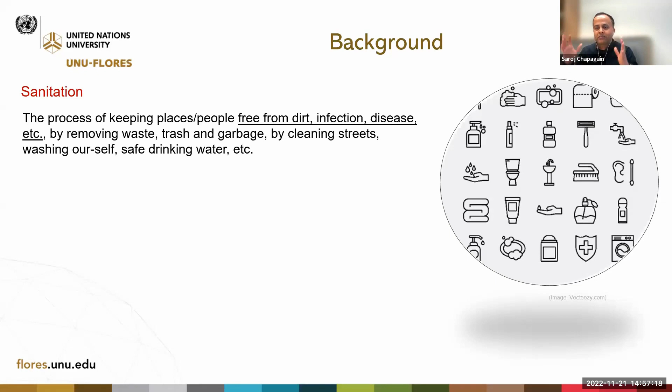So you can see in the picture, it comprises a range of activities. But due to the time and today's presentation scope, we are not able to talk about all those sanitation aspects. So I'll be focusing here on dealing with the handling of human excreta and urine, the safe management, handling, or treatment of human produce like excreta and urine in our daily business.

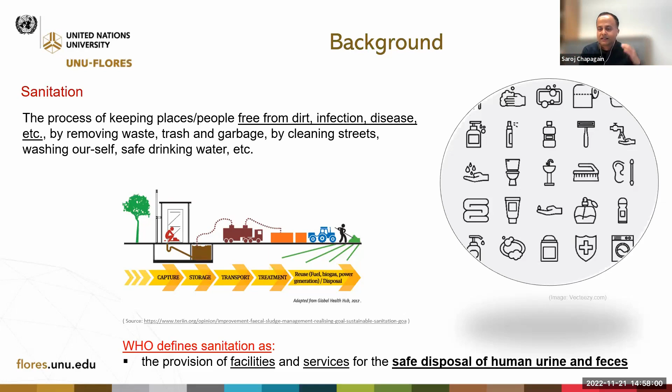WHO has a strictly narrow definition of sanitation: they talk about the provision of facilities and services for the safe disposal of human urine and feces. Today we will be focusing more on sanitation this way. However, sanitation could be understood from a very broad perspective, so please consider today's sanitation from that aspect.

Having said that, sanitation is about human produce excreta and the safe disposal of it. So how has this sanitation been addressed in our UN development goals?

We can see from the MDGs, the Millennium Development Goals, and the currently ongoing Sustainable Development Goals, that both UN development goals have given high priority. The MDG talked about halving, during that time, the population who did not have sanitation, which was almost more than 2 billion people they targeted. Again, the SDG talks about sanitation as a universal access right, accessible for everyone, and it should not lack for any person from improved sanitation.

So having given this high priority, we can still see a huge number of the population deprived of good sanitation facilities. Almost 700 million people don't have a toilet at all, so they might be practicing open defecation. We will come with all these figures and detail in a later part, but despite big efforts, there is still much to do to achieve universal access to sanitation systems.

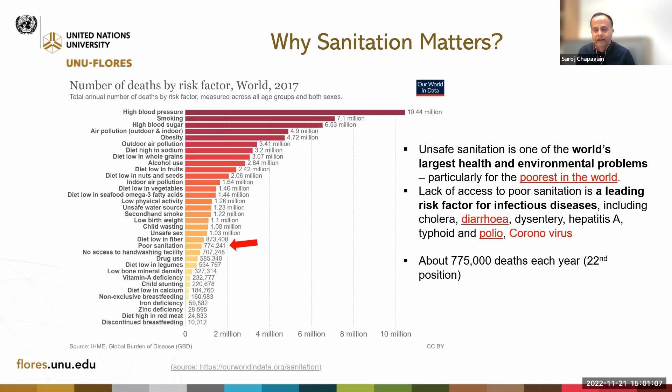So it has a very high risk to human death. Looking at the actual figures in 2019, this shows the real picture: 1.4% of global deaths occurred due to poor sanitation.

It is especially a major cause of death in many developing countries where sanitation facilities are not good. It's been said almost 5%, but this map shows one of the countries in Africa, Chad, where almost 11% of total deaths were caused by poor sanitation. So out of 10 deaths, one is linked to poor sanitation, showing how sanitation is directly linked to good health and people's lives.

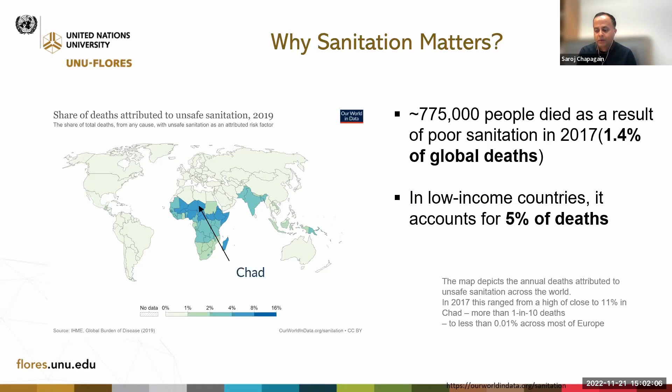As I said before, two days back we celebrated World Toilet Day, and it has recently been stated by our UN Secretary General that every dollar invested in sanitation will have a return of five times, a five-fold economic value returned.

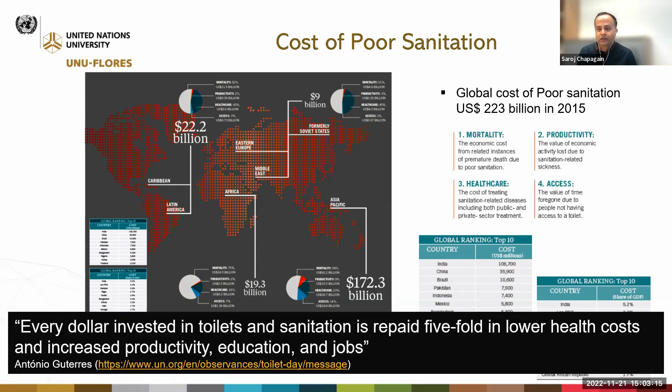It's important for all of us to know that water and sanitation have a very complementary relationship to each other, because good sanitation leads to or provides a good water environment. Likewise, to maintain good sanitary practices or good sanitation, water is very crucial. That's why we talk about water and sanitation together in most of our development plans and SDGs.

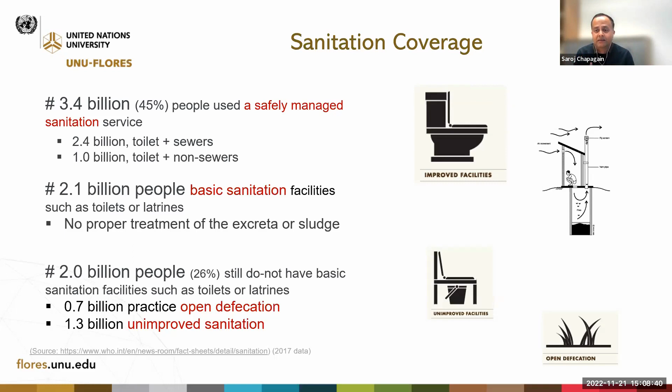Today, I believe we have attendees from different backgrounds, and some of you may not be aware of this system. So it is good to see how the world is living without this basic sanitation, which many of us maybe cannot imagine, right? So this is the situation of the world.

To clarify the different terminology I recently introduced, this is also called the sanitation ladder. So how has the sanitation ladder been defined? Because we have the very lowest level, meaning there is no fixed toilet, no fixed place to go for your daily business, for releasing your excreta. So what we call open defecation, it's like hopping around here and there to find an appropriate place to do their business. And safely managed sanitation is the highest level of sanitation practice, where people have good access to facilities, and their excreta and waste are well treated.

So we'll be talking about what safely managed system means, and why the ladder has changed going from the MDGs to the SDGs, and what the limitations were with the MDGs, in the next slides. Please be aware of this sanitation sequence or ladder, how it has evolved from open defecation to safely managed sanitation systems.

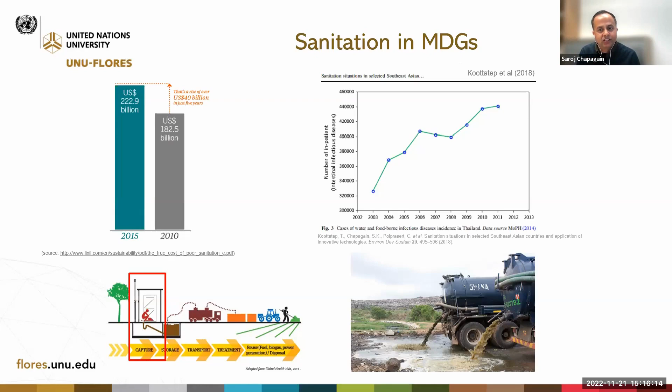So in the MDGs, the earlier focus was given to facilities, which is a very good entry point to achieve, but it is not complete sanitation practice. That's what we'll be talking about here. So to give you some insights about common sanitation practices or waste treatment systems, we are all familiar with the centralized sanitation system and the decentralized sanitation system, also called sewer system and non-sewer system, right?

Most developed countries have a centralized sewer system, meaning all toilet-related black water and excreta, even gray water, will be collected in a central system. Normally it is located downstream of any watershed or urban setting, and it will be treated and safely disposed of. So there is no risk to health or the environment.

But this is not the situation for many developing countries, as we've already discussed. The issue here is, when we talk about sustainable sanitation systems, about a circular system, the centralized system is obviously a good choice, but it requires a lot of investment—a lot of initial investment, operating cost, and energy for all the treatment issues. There's also poor opportunity for reuse, because the waste treatment system is generally located at the bottom, downstream, with all the waste drained by gravity to the bottom. So it is really difficult to come back and reuse it in the system.

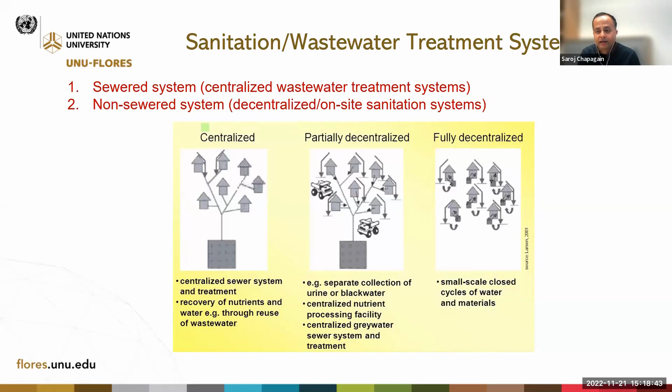I don't know details about our attendees or our participants.

Some of you may be wondering how it works and what are the basic functions of sanitation systems, so let me give a brief idea of how it works. A decentralized sanitation system means everything is done in a small scale nearby where the waste is produced.

So normally every household or community will have some sort of collection or primary treatment system, what we call an on-site sanitation system. Commonly we have the septic tank system, and there is also the cesspit or cesspool system. Let me describe these two systems.

The septic tank system is a watertight and water-sealed system, so there is no leakage - there is incoming and outgoing water, and it has basic sedimentation where the excreta gets deposited while the water gets out with some hydraulic retention time.

On the right-hand side, you can see the earthen structure made by cement rings or some earthen material - this is called the cesspit system, which is, in fact, technically unconfined.

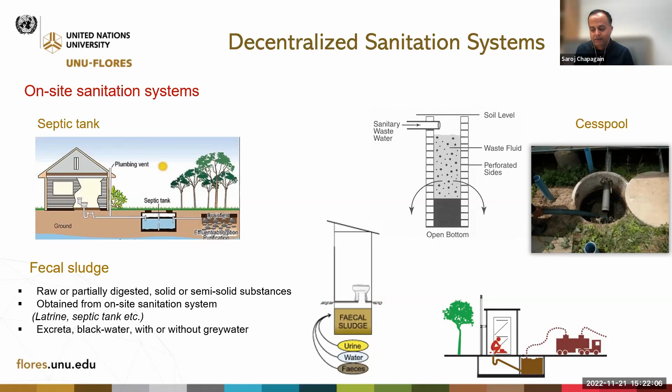This sludge has still not been fully digested, and it still has pathogen ability to cause diseases. So it has to be taken out from the system and treated offsite in a way that resources could be recovered. This is the basic thing we have to know about decentralized sanitation systems.

This shows the sanitation chain - the safely managed sanitation system, which is one of the targets for the 2030 SDGs. Once things get full, the desludging trucks come, and the sludge has to be taken out from the on-site sanitation facilities to make it usable for the next use.

Then it will be brought to wastewater treatment or decentralized treatment plants where it will be treated, and then it will be used either as a soil conditioner or fertilizer - resources brought back to the agricultural field.

The water, depending on the level of treatment, can be either used for irrigation purposes or drained safely into the river system. This is the ideal picture of what we call the safely managed sanitation system under decentralized sanitation practices.

Why have we been focusing on this? Because sanitation issues exist in many developing countries where investment is not possible. This is the right time because they are investing in sanitation infrastructure, or practicing for good sanitation systems.

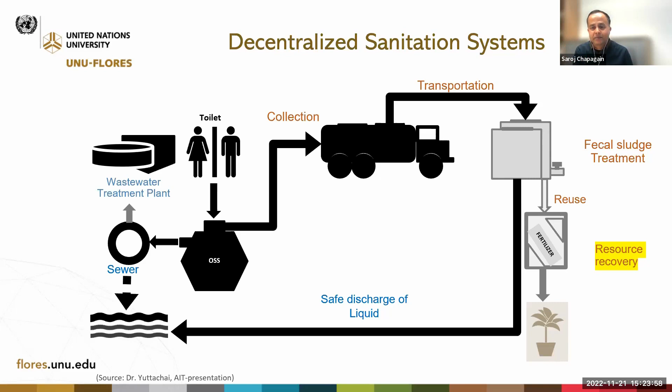We could see the trucks - until the trucks come, it's okay, because if the system gets full, the user will call the trucks, meaning they need services to empty their devices, otherwise they can't use the system.

But the trucks are not bringing the collected sludge to designated treatment plants, or there are not enough treatment plants, or there is no functional or sustainable treatment system, so it is not functioning well. Most of the time, all this sludge, which still has potential to cause diseases and water pollution, which should be removed from on-site sanitation devices and containment, gets brought back or released directly into the environment.

That is not the real objective of having a good sanitation system, yet that is what is happening in most cases. We have to break, or amend, this condition, and there is a need to work with this sanitation chain and figure out how to maintain the closed loop system. That is the most important issue for sanitation practitioners, planners, or researchers, because we need to make this system well functioning so that it works the way it's supposed to. We come from different backgrounds.

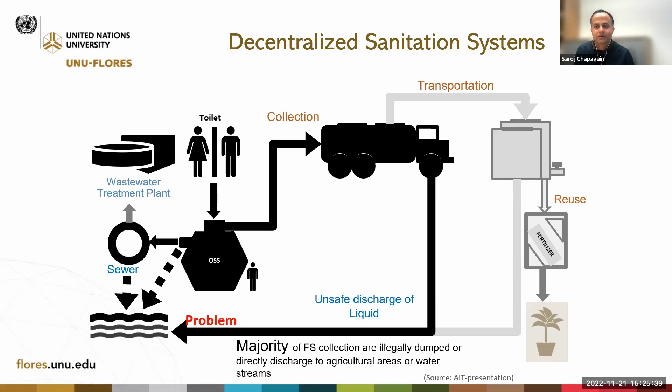If we think from one perspective, it is not only about waste, but also the economic perspective, the business perspective. That could make a contribution to achieving the 2030 SDGs.

From the sustainable sanitation perspective, let's see what is currently happening, either in decentralized or centralized sanitation systems. We take resources, the water resources, or the nutrients in our daily food from agriculture, and bring them into the household, meaning we consume all these things. Even in our centralized system, where there is no risk to the environment or outbreak of diseases, we are not bringing things back to where we took them from.

In this linear system, it has resulted in continuous dropping of our water resources, meaning the groundwater is getting depleted. Another issue is that waste is directly discharged into a river or pond, wherever they feel free to dispose of it. This causes disease and water pollution. If we remember, about 80% of rivers in most of the developing world are polluted due to this kind of domestic waste. So water pollution is very severe.

As we see with water pollution, sometimes we have the water, but the water quality has been deteriorating, meaning we are not able to use it. Technically the water volume is there, but we are not able to use it due to poor quality. So not only is water quantity an issue, but quality is also lowering the usability of water, and that is linked with poor sanitation.

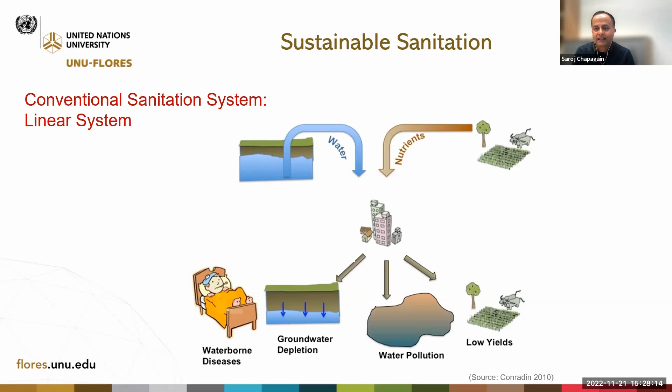In another way, we can see the nexus perspective, where recovery is very urgent. If we think from the perspective of a sustainable sanitation system, if we have a good system that can bring back all those resources we have taken from nature into one system, like all the treated water, if it goes back to the groundwater or the river in good treated condition, it can also replenish the water level or help maintain the environmental flow.

Sometimes we can also bring back waste that is organic in nature, with a lot of nutrient value. If we bring it back to agriculture, it can provide good fertility. This is the way to think about it, but I think these are not very novel things, because everybody knows this. The important thing is it has to be done in a systematic way, because this is a loop. So this is fundamentally okay, but how to do this is very crucial, because it is not a single discipline.

It is not just about having a toilet system, or the desludging facility like trucks and treatment systems, because sometimes there are treatment systems, but only a limited volume of sludge is brought to them, because they are either located very far from the household, or not of enough capacity. So these are not economically profitable for the service provider, meaning the truck owner.

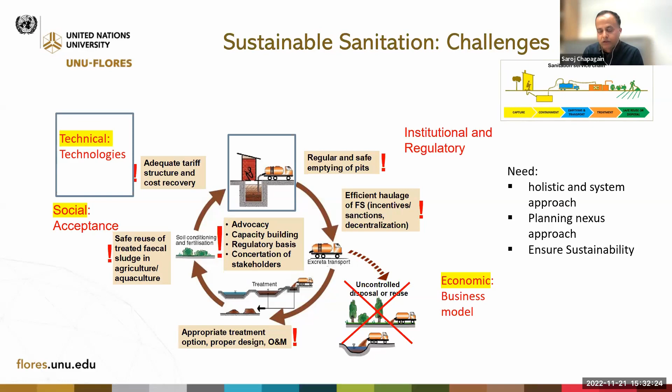This is work I am sharing with you today from my direct involvement with AIT, where I worked on a sanitation project funded by the Bill and Melinda Gates Foundation.

The idea of the Gates Foundation is that every life has equal value. As I said before, a huge number of people have a poor life due to poor sanitation. This is also a matter of dignity, a health issue, and an economic value issue, as well as a productive activity issue, since people are not able to work due to disease.

So the Gates Foundation granted a huge amount of money for reinventing the toilet. Some of you may wonder why we need to reinvent the toilet, since our toilet systems are working well and there is no issue, right? But that is not the case, because some of our currently practiced systems are not affordable and maybe not sustainable in many cases.

If you look at other sectors, there have been huge developments in the last 50 years. But the sanitation systems we have been practicing, like septic tanks or other household systems, are from very ancient times. There has not been enough advancement in sanitation systems for a long time. With that thinking, there was a big call for the reinventing the toilet project. Our institute, the Asian Institute of Technology, received a grant, and I worked on this project.

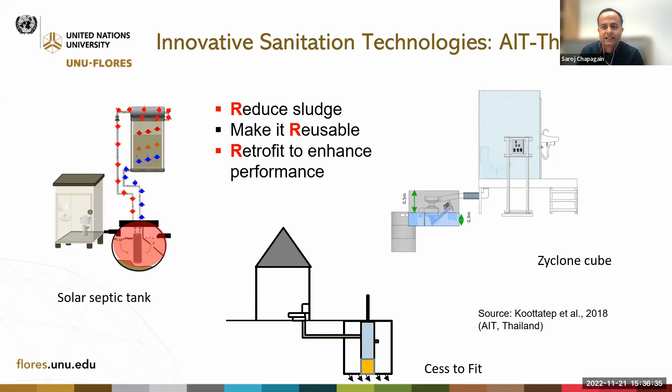So these are the three key technologies and the three motivations that we work for in innovating the new sanitation system, or especially the reinventing toilet system.

And today, this is one toilet system that one of my colleagues developed as part of his PhD, a solar septic tank system. The idea here is, as you see in this figure, on-site sanitation systems have limited usability - they can work for certain years, let's say 3 to 5 years depending on usage, then they have to be emptied, the sludge removed, to make space for the next use. So the goal is how we can reduce the sludge from the containment, the septic tank.

So the concept he introduced was operating the septic tank system differently, because normally tanks operate at ambient temperature, fluctuating with the environment. But he used the system to make it thermophilic, in the range of 40-50 degrees Celsius, activating high-temperature-loving bacteria that work more efficiently. This has the capacity to digest in a more efficient way, so that the sludge can be reduced by half, according to his research findings.

So the ultimate goal was to reduce sludge accumulation and extend the service period. For instance, if the system normally works for 5 years, with this new improved sanitation system the same unit can work for another 5 years, meaning it works for 10 years total. This reduces potential threat to the environment, even if there are wrong practices.

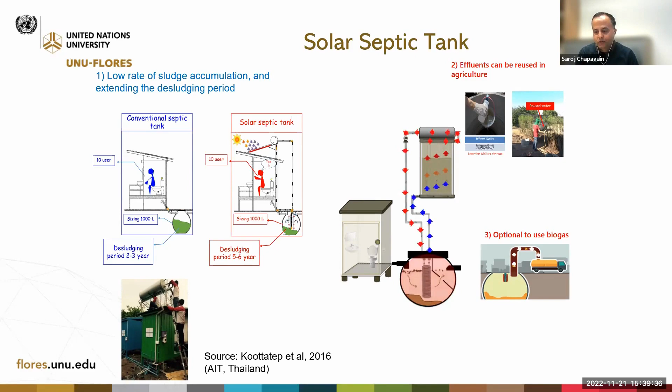So that makes it possible for the resource to be reutilized for agriculture or plantation, and also the sludge can be reduced. So this is the way we developed a new sanitation system to reduce environmental threats.

And the second one - this is also a sanitation system that I was principally involved in, from the beginning, from conceptualizing the design and prototype and everything. We call it the Zyclone system.

So the basic idea here is, in a normal conventional sanitation system, people in their daily business produce about 200 to 250 grams of excreta, but we use 300 to 500 liters of water to flush it away from the place where it's defecated, right?

A huge amount of water is being used to carry or flush out and transport waste from the point of generation to the point of treatment or collection. If you see, all the water we have been using for flushing is most of the time our drinking water. So there's really no contamination, but we are mixing and increasing the volume by using this clean, pure water, treated water free from pathogens, to flush the waste. So we are expanding the level of pollution by bringing a huge amount of pure, pathogen-free water into potentially pathogenic fecal matter, expanding the chances of contaminating the water.

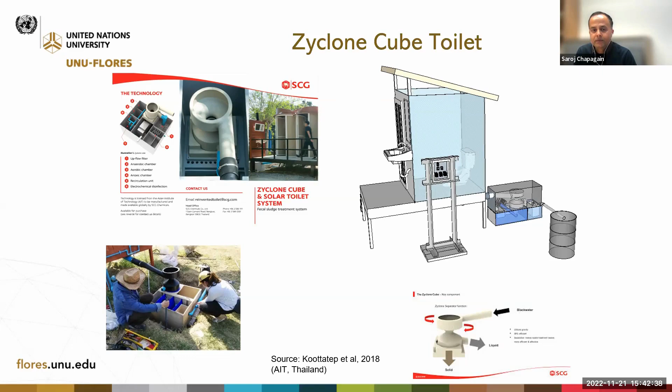The third one I would like to share with you: as I said, one of the dominant sanitation types is the cesspit or cesspool system. I've introduced many terms, so don't be confused. The reason it's widely used is that it's simple, cost-effective, and local technicians or people can construct it themselves. There's no technical specialty or specification required, so this is widely used in many developing countries.

But as I said, this is not good enough to hold the water, so it can directly leak and seep into the nearby groundwater, which is not good for groundwater protection. Many households have been using this system, so there is a way to think about how we can improve its performance.

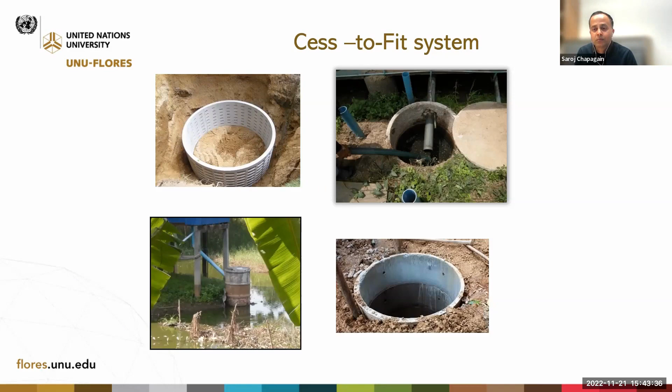So in this regard, one of our approaches is to design a new system that can be inserted and fit into the existing system. My colleague developed a new concept of how to make an unconfined existing system into a confined system by introducing a new device or structure. He named it the cess-to-fit system. That's the idea here.

He developed a new system with new media—the media and hydraulic retention are the technical details—but they introduced a system that can work more efficiently. It can hold things more watertight, doesn't allow leakage out of the system, and fits into the existing system. After some hydraulic retention time, the contents can be safely disposed of.

So these are the three innovations that have been developed by AIT. But besides that, if you have interest in sanitation innovation, there are good platforms and resources, and a couple of other technologies. These are the technologies where I work, and I've presented them here, but there's plenty of other technology that other institutes and universities around the world have developed and that is now being commercialized. This field has been hugely developed, given high priority, and is continuing to improve.

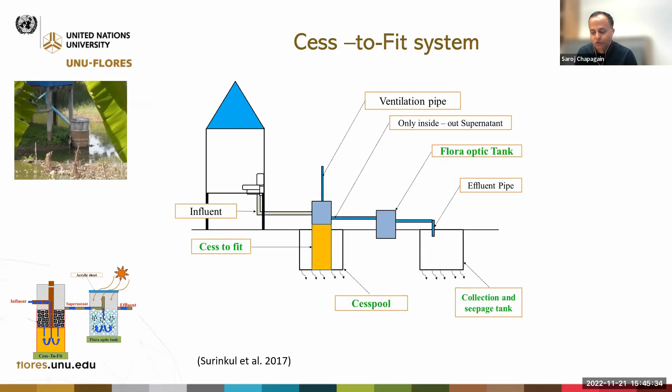I think we have to further advance, but the key essential thing is how to do these things in a holistic way, so that everything works effectively and sustainably—that's the major issue. To conclude my presentation, let me summarize: I've talked about many aspects, but the key thing is SDG 6, which remains central to the SDGs. As I said, it plays a centripetal role in achieving all 17 SDGs.

But if you look at the current statistics, maybe due to COVID as well, it is lagging behind. So there is more effort, more action, more work needed to meet the goal. We have to accelerate the current progress and activity to achieve the goals.

Now, what about the centralized sanitation system and the decentralized sanitation system? No doubt, the centralized sanitation system has high efficiency, less footprint, and is more efficient in many ways. But on the other side, it's cost intensive, energy intensive, and requires high tech. Many of the problems currently faced are in developing countries, and these are not affordable in many cases.